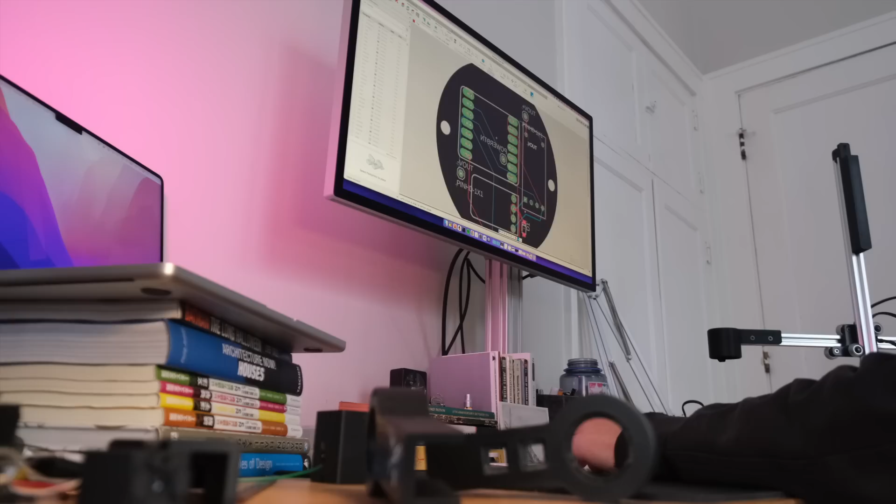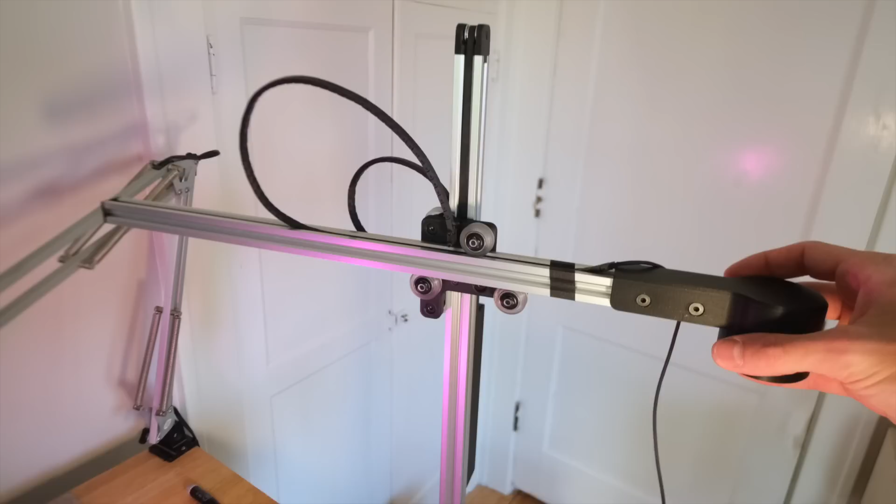I've been making some progress on my open source version of the Dyson light cycle, and I have some pretty exciting updates to share. Last time I managed to implement a drag chain based cable management solution that, while not as tidy as the original Dyson solution, does the job in a way that's affordable, easily reproducible at home using 3D printing, and is relatively discreet.

This time, it's all about terminating that wiring with some electronics and lighting controls.

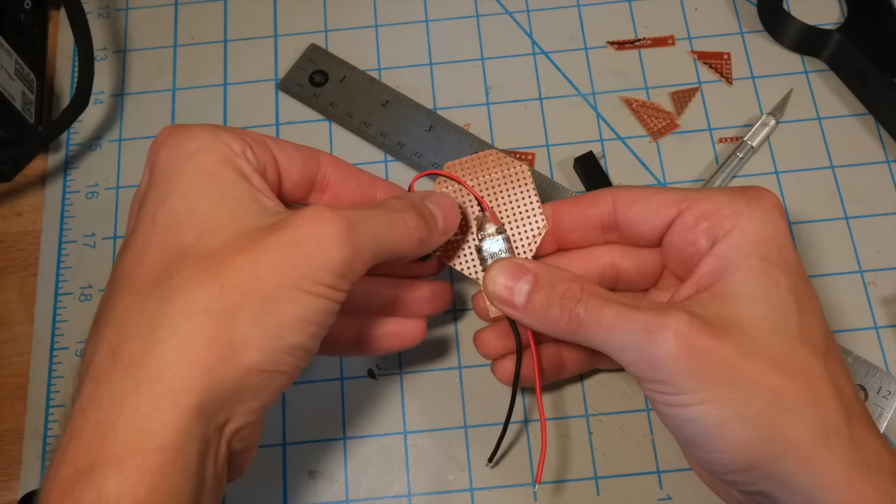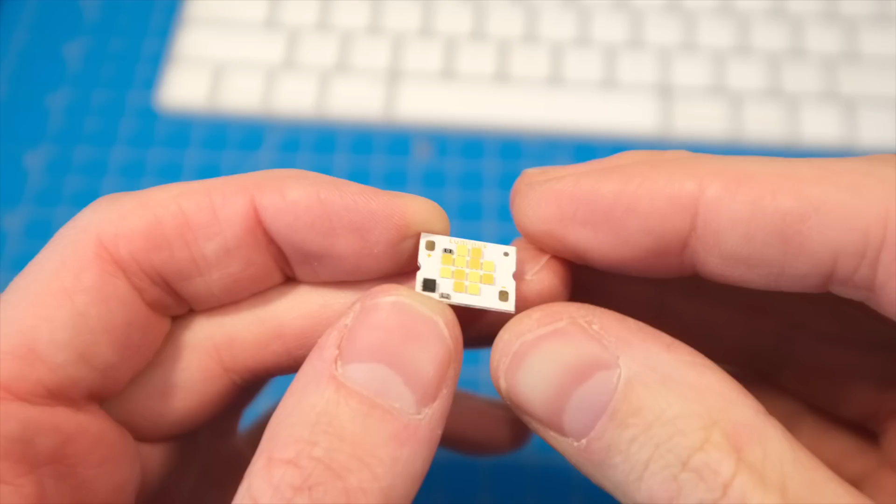One of the questions I've left unanswered until now is how is the user interface of the lamp actually going to work? As a bare minimum, I need a way to cycle the power on and off, and also to control the brightness level. The real Dyson has additional advanced features, like the ability to match ambient brightness and light temperature of the room, but I'm going to keep it simple for now and just stick with power and brightness, though I'm already investigating ways how I can add variable color temperature in future versions.

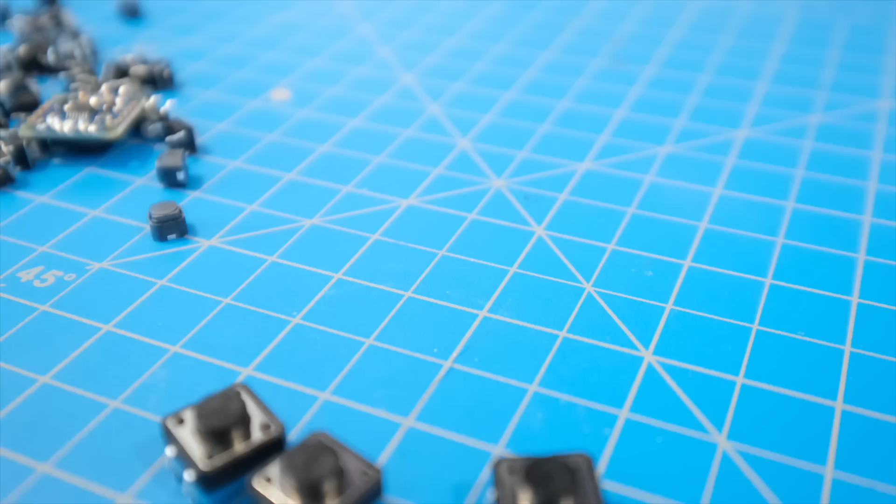Put simply, I need a hardware solution for talking to that code that I covered a few build logs ago that determines the brightness of the lamp. And I think I can do this with 3 buttons: one for toggling power, one for increasing brightness, and one for decreasing brightness.

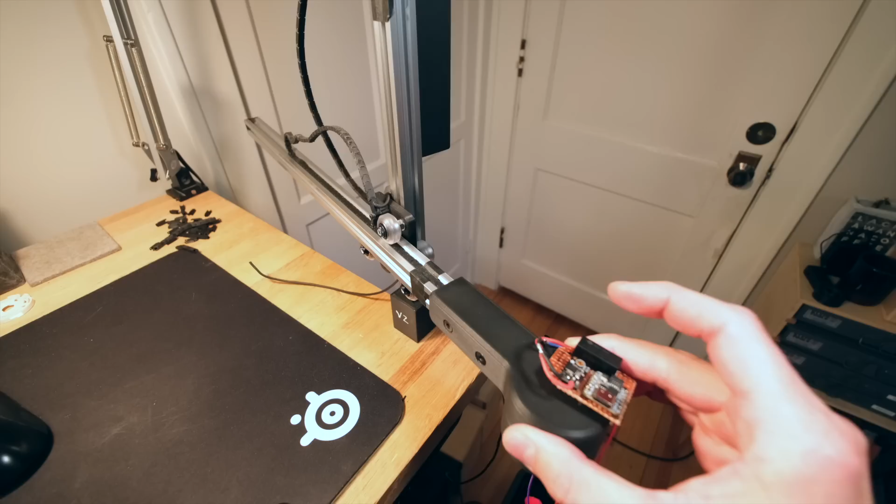Like the original Dyson designers, I think the best place to put these controls is in the same general area as the LED itself, because this is where I'll typically be interacting with the lamp when positioning it. So intuitively, it just makes sense to me to put the controls right here as well. This placement has the added benefit of simplifying wiring since I'm already going to cram all of my electronics inside of this housing anyway. More on that later.

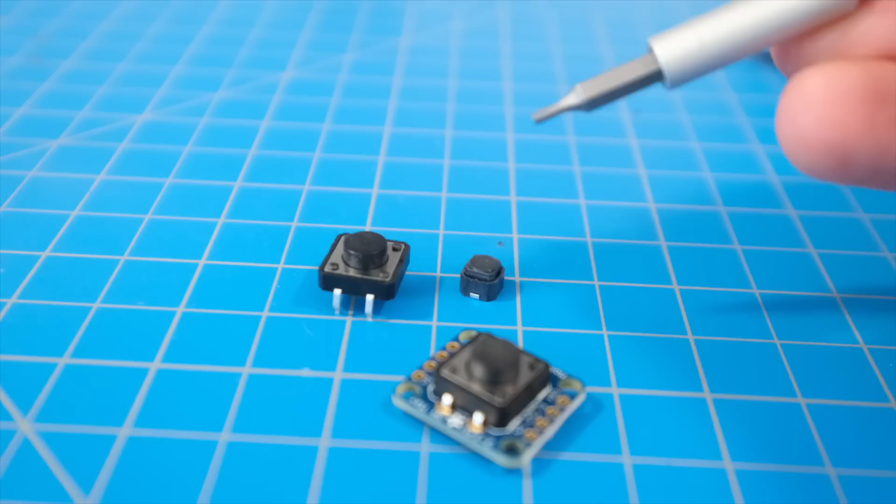Basic momentary buttons like this are an obvious, reliable, and affordable choice. In most cases, the force required to depress the button is negligible. You wouldn't even think about it as a problem or a constraint, but here it poses a problem because the lamp's motion system is meant to move with just the slightest touch. And I spent a long time making sure that this was the case. As a result, the amount of force needed to depress a mechanical button like this is more than enough to reposition the entire lamp. So for reliable one-handed operation, I'll need to find another solution.

A better solution would be a button that has no resistance at all, say a capacitive button like this one, made by Adafruit. It's designed to operate just like a traditional clicky button, but the switch is triggered when tapped by a conductive object, like your fingertip, as opposed to a mechanical switch. These Adafruit ones are beautiful in their own right, but I've always envisioned these buttons sitting flush with the top of the LED cover, and I don't really see a straightforward way of mounting them so that we get that flush look.

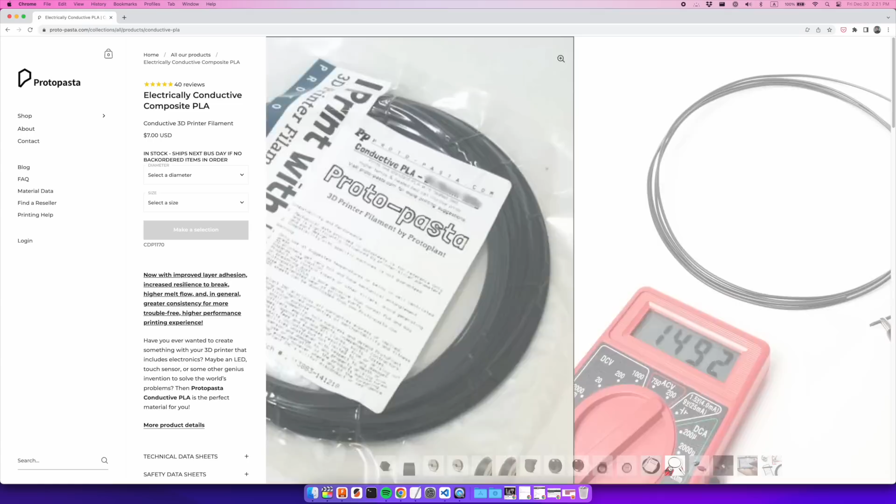I chewed on this problem for a couple days, and then I remembered that at some point I had seen that Protopasta sells this specialty filament that's electrically conductive, and if it works like they say it does, that should mean that I could just 3D print some buttons in whatever shape and whatever form that I want, and use them to detect taps. I ordered this 50-gram sample of their electrically conductive composite PLA, and to my surprise, I had working 3D printed buttons within minutes. Well, it wasn't actually quite that easy.

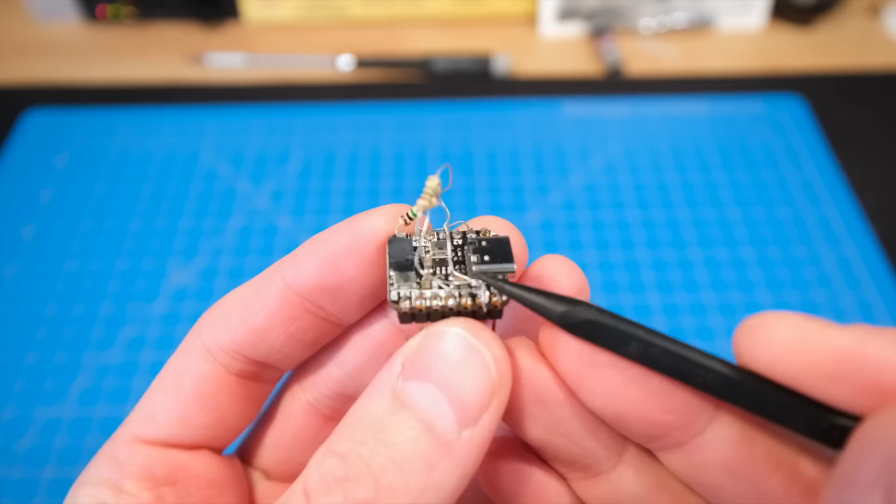The version of the QT Py that I have, the RP2040, doesn't natively support capacitive buttons. So to make it work, I had to add resistors to each of the 3 pins, connecting them to ground. It turns out there's another QT Py model called the QT Py SAMD21, which functionally is, for my purposes, almost identical to the 2040, but it comes with native support for capacitive touch. So I went ahead and just made that upgrade.

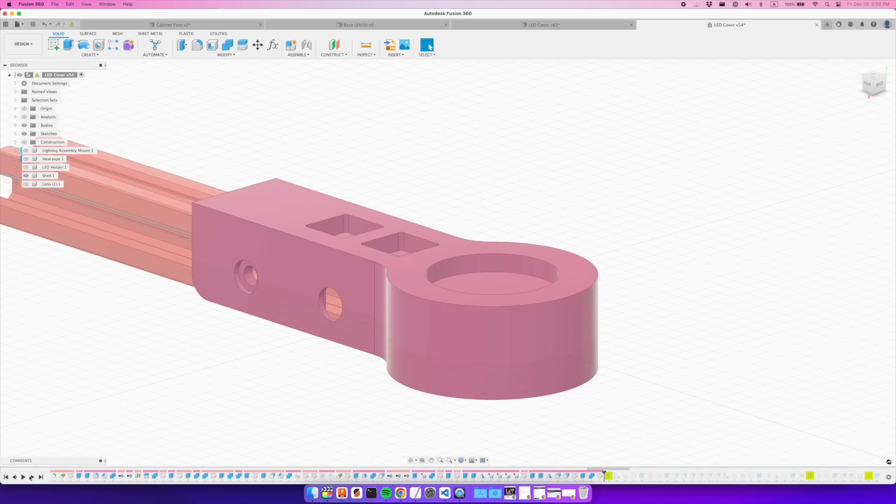With the proof of concept for the capacitive buttons complete, now it's time to integrate them into the LED cover and ideally make them look good too. My original vision for this is that the buttons would just sit flush with the surface of the LED cover, almost like they're directly integrated into that part. My thinking here is that this would achieve a nice streamlined look, and it would mimic the minimalist nature of the original Dyson's controls. But after prototyping it out, I'm really second-guessing this concept. I definitely see a bit of that minimal aesthetic coming through, but there's just something off about it.

I think the thing that's bothering me is that when you're in a newer car where the console is made up of almost all capacitive buttons, I often find myself fumbling around blindly, just pressing buttons accidentally, and having a really frustrating time. In those situations, what I really want is something physical and tactile, just a little feedback so I can locate the button without looking and then press it.

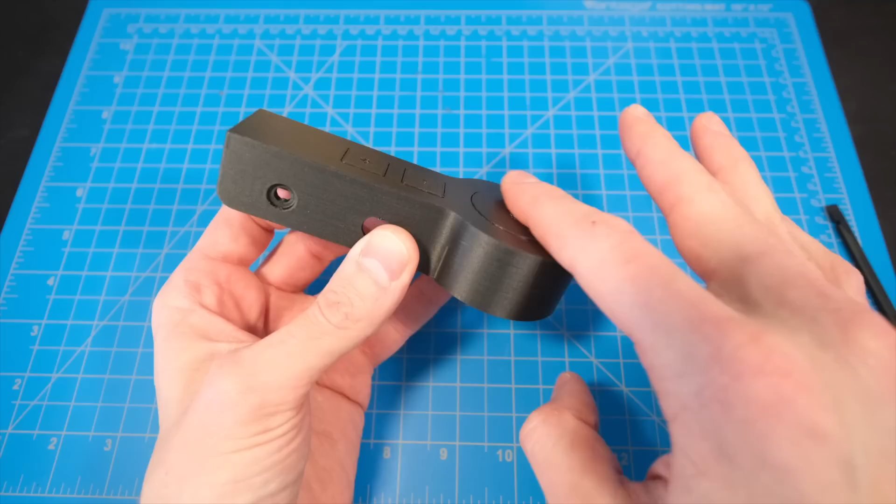That's what's so great about old-fashioned knobs and mechanical buttons in cars - it enables this two-step process of orientation followed by interaction, where you first probe the general area of the button you're looking for, and then decide to interact with it. I think that's what's missing here. As tempting as it is to strip away visual noise and complexity, it's hard to justify that decision when it leads to a worse experience.

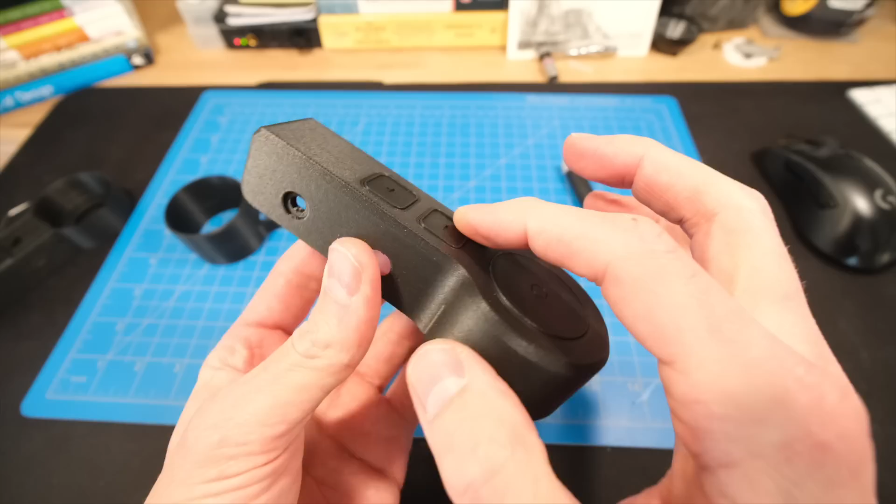So let's make sure these steps happen in the right order - orientation first, then the choice to interact. With that in mind, in my next iteration I added a raised perimeter around the outside of each button to act as an orientation device. You can creep your finger along the surface of the LED cover and know exactly where you are at all times without any accidental button presses.

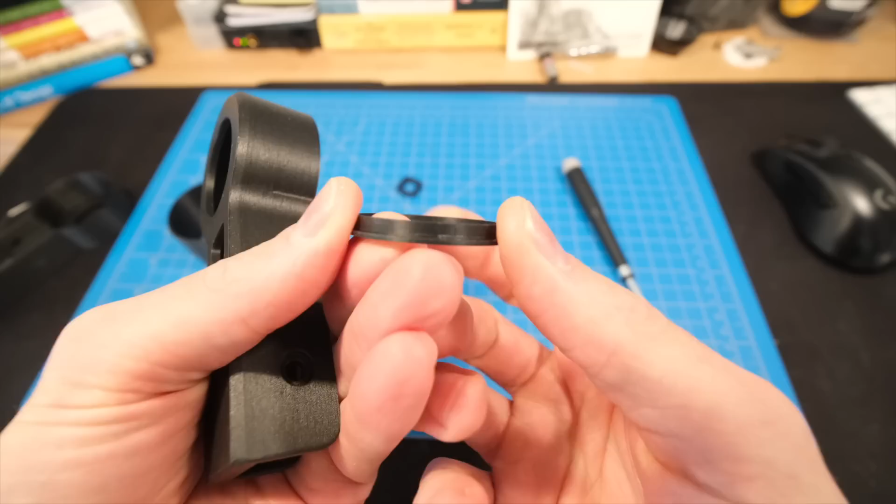Outside of the usability benefits, there's also construction benefits. Since these raised perimeters sit just above the surface of the LED cover, I have to make them into independent little sockets, printed separately and snapped into place afterward. This eliminates the overhang from the previous design and produces a much smoother, more consistent surface, meaning the buttons and sockets will always slide perfectly into place and sit parallel to the cover surface. It's a small thing, but it really helps tidy up this area and make it look nice, neat, and intentional.

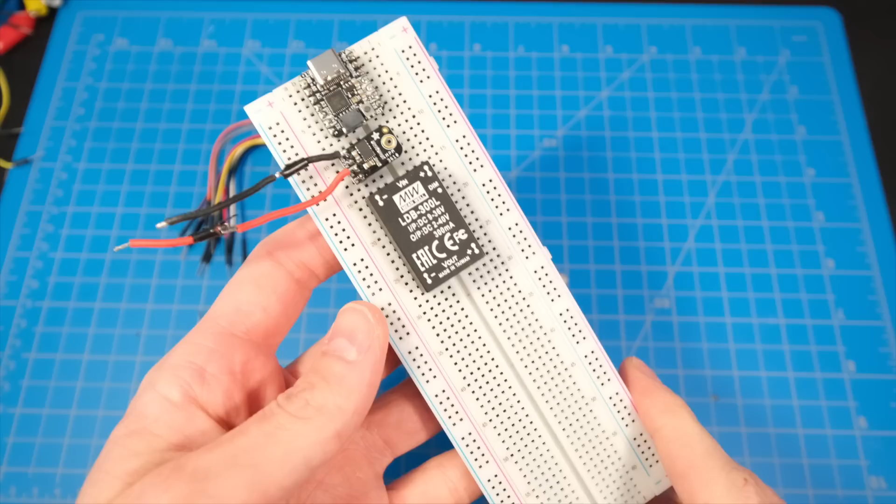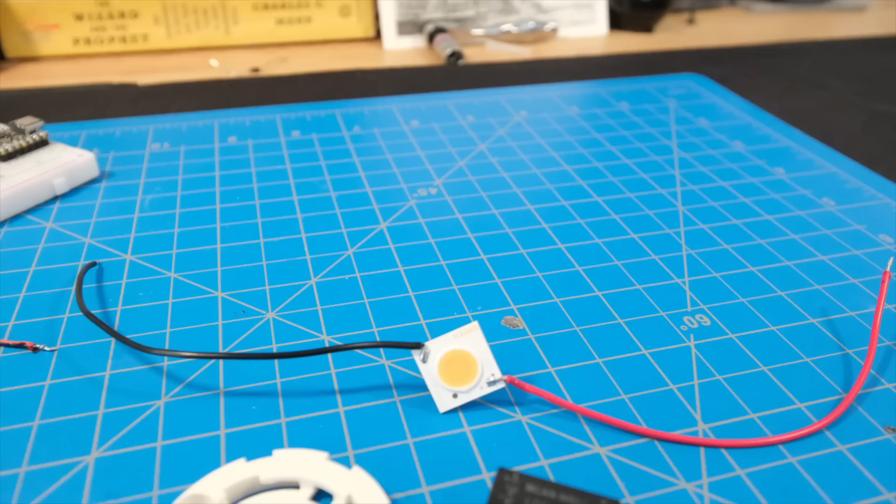These buttons are pointless if they don't control anything, so let's switch gears to electronics. First off, I have some new components. Trying to cram all the LED electronics into this tiny housing, it was immediately obvious that this LED power supply was way too big. Finding a smaller LED driver was easy, but it broke compatibility with my LED, so I had to take a step back and do that cabbage, rabbit, fox riddle a bit more until I found an LED compatible with the driver and a holder compatible with the LED.

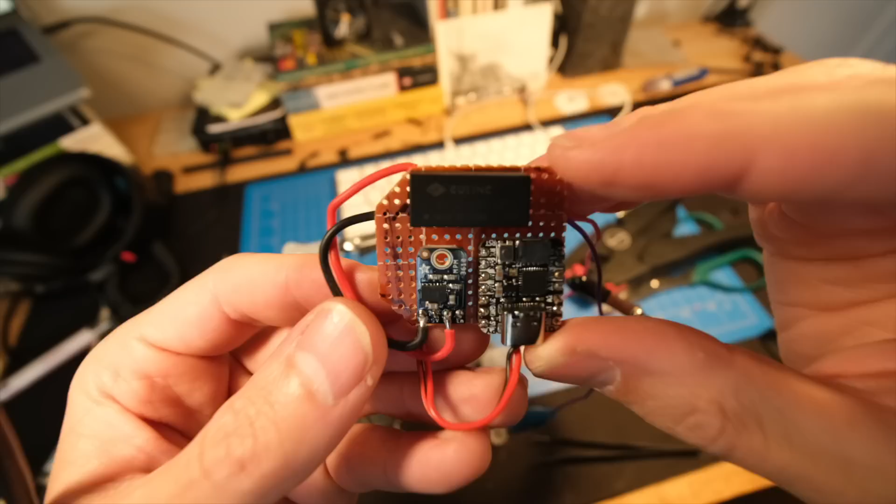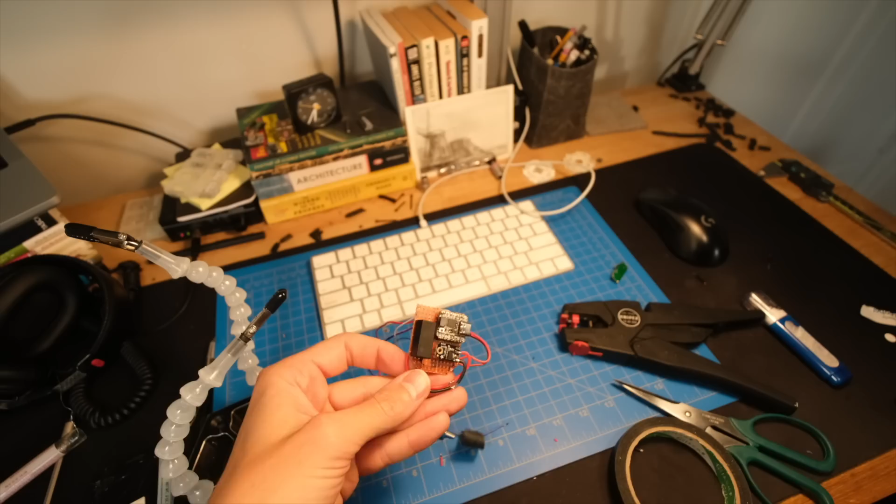With those in place, I can finally move on to the fun part, which is that I made a PCB - my first PCB. I didn't really think it would come to this, but I wasn't satisfied with my attempts to cram all these components into the LED cover. If you've done a project like this, you know simple things like wires can take up a lot of space once you try to wire components together, and space is so limited here that every square millimeter counts. Fitting everything onto a custom PCB saves a ton of volume, letting me cram everything in tidily.

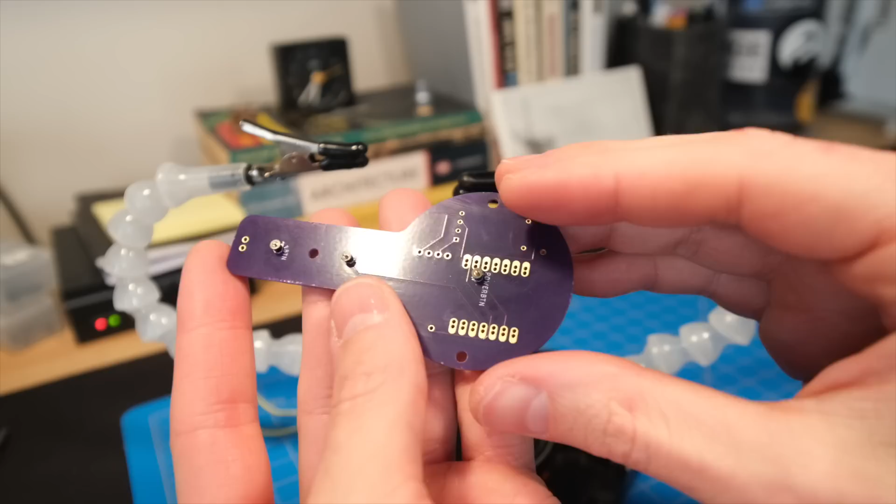This is my PCB. On top there's the QT Py for controlling the brightness, the LED driver sits next to it, and there's a buck converter which powers the QT Py. I also added a little diode which ensures the 5 volts coming from the buck converter into the QT Py only goes in one direction. On the back, I have 3 pogo pins aligned perfectly with the capacitive buttons on top of the cover, ensuring constant contact without having to permanently attach those buttons to the PCB.

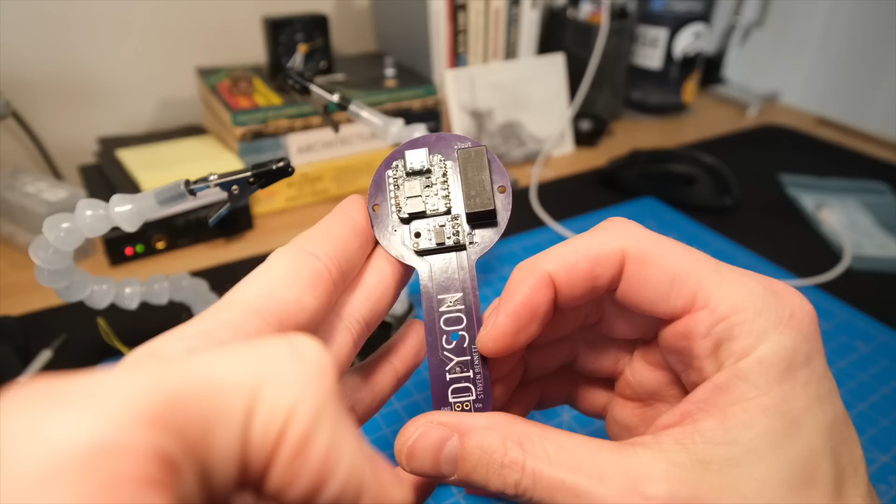I'm really satisfied with how this PCB turned out. I was initially really intimidated by the prospect of designing a PCB, so pulling this off feels like a personal milestone, and weirdly it was both harder and easier than I imagined. I want to call out this guide I found on Adafruit, which is a perfect introduction to both the theory and execution of designing a PCB. I'll leave a link in the description for anyone who wants to break into this, and I'd really recommend it if you have a project that could benefit. I seriously can't recommend it enough.

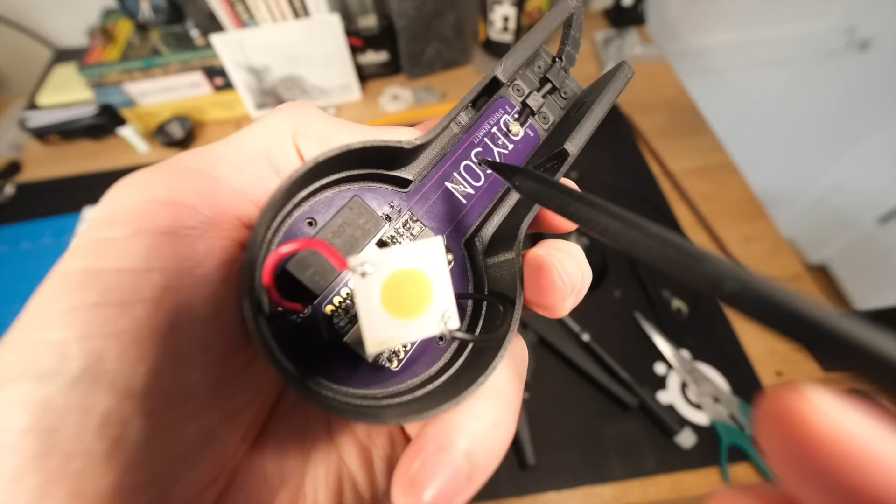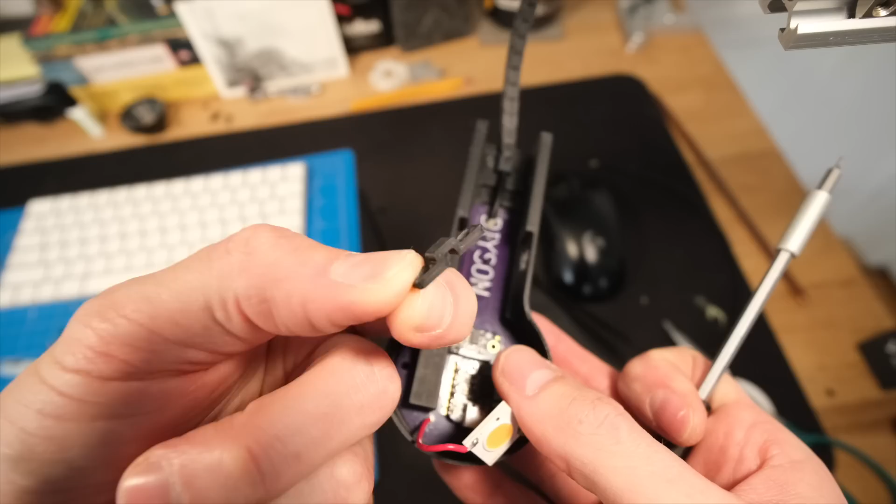Alright, back to the lamp, and it's time to mount the loaded up PCB into the LED cover. These 3 holes are used to mount the board in this little recess, held in place by 3 M1 panhead screws screwed directly into the plastic of the LED cover. The final touches are a little strain relief clip for the power cable, and one more drag chain termination piece to tie everything together.

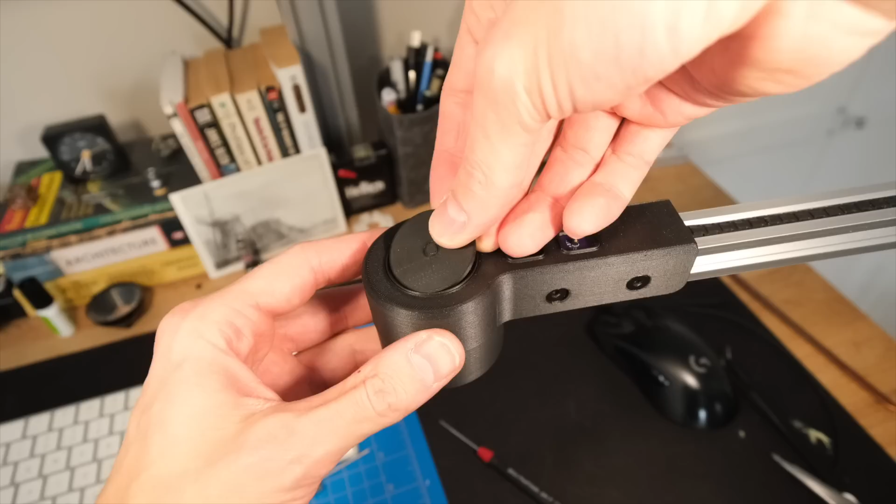And now, finally, it's time to power on the lamp for the first time - a momentous eventuality that has pervaded the consciousness of at least several people for over...

It flickers. Fortunately, this only appears on camera, and double fortunately, it does seem like the PCB is working correctly. But yeah, this flickering is really bad, and I can't use this lamp on camera if it continues to do this.

To be totally transparent, I have known about this problem for a while. The flicker only appears on camera, so I didn't notice until I started shooting the electronics portion of this very video.

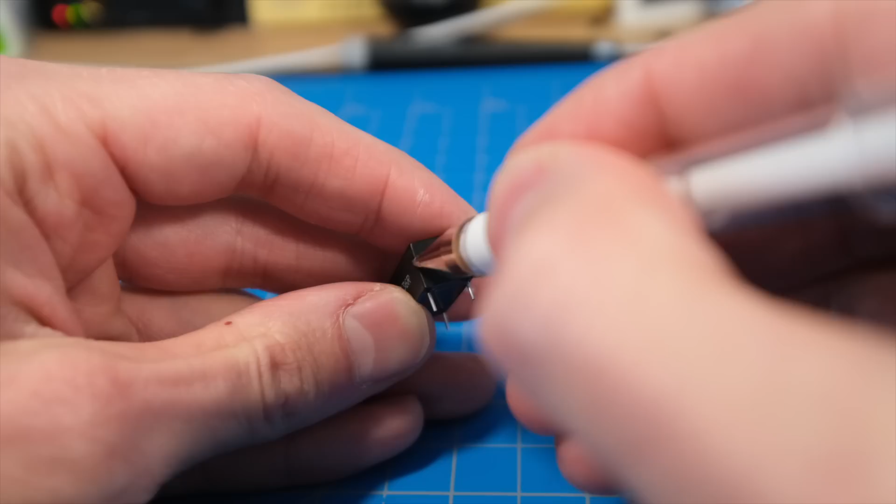My first instinct was just to eliminate the flicker by increasing the PWM frequency. This LED driver is already maxing out at 1 kHz, which is its maximum frequency, so I had to do some careful overclocking. After that was done, I quickly went into the code and cranked the frequency up to 4000 Hz, where mercifully the flickering stopped.

And that's where the whining started. It turns out that pushing the PWM frequency beyond the stated maximum, even if you overclock it, introduces a high-pitched whine that, by the time you get to 4 kHz, is audible from a few feet away.

So that's the dilemma I'm faced with right now. Do I keep the frequency low and deal with the on-camera flickering, or eliminate the flickering by introducing the whine? To be honest, I don't think either way is really acceptable for the final version, and I'm a little stumped with what to do here.

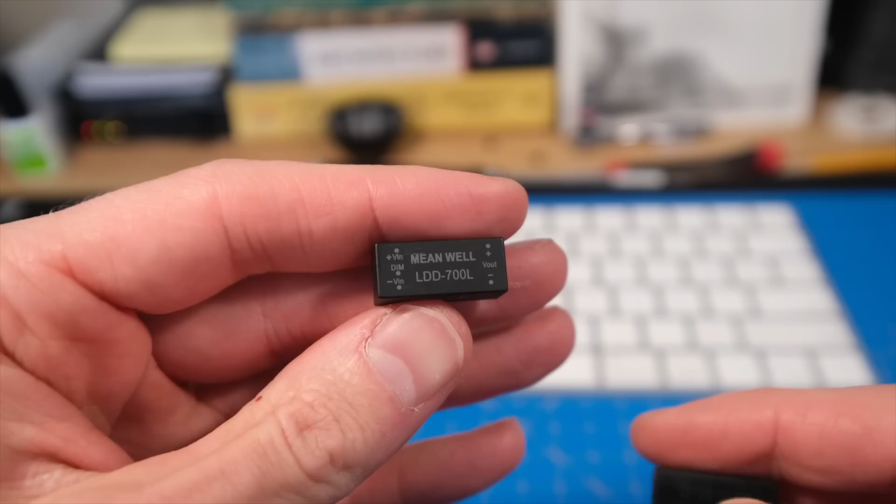My only concrete path forward right now involves swapping this for a driver that has analog dimming, but that comes with its own challenges, because electronics is a real weak point for me.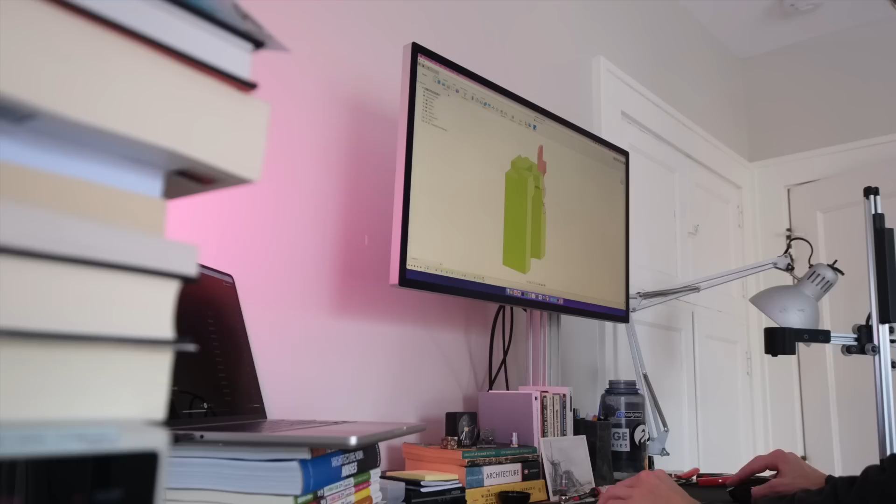For now though, for your sake, I'm going to choose the less visually objectionable option and leave the frequency overclocked, and I'll spare you from the whine. Alright, I'll keep dealing with this, I'll find a solution, but let's move on to some other updates.

Down at the base of the lamp, I integrated a drag chain termination clip into the base adapter. This clip is really similar to the one that we saw on the LED cover, and it just functions to hold the drag chain in place and give the cable a safe exit route.

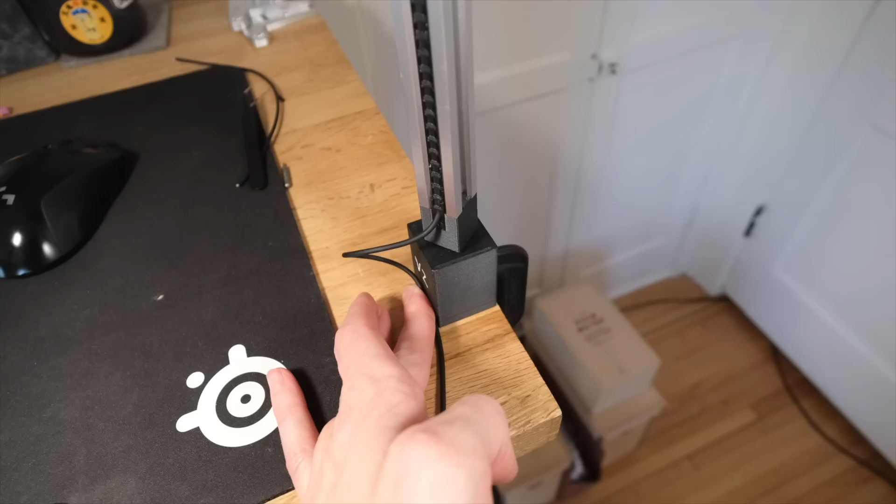While we're down here, I've also started working on how to make the transition from this dynamic part of the lamp down to the static base. I could just leave enough exposed slack that would allow the lamp to turn a full 360 degrees, but if you watched any of my last build logs, you know that I rarely settle for the first solution. So I want to find a more elegant solution to completely hide this transition into the base.

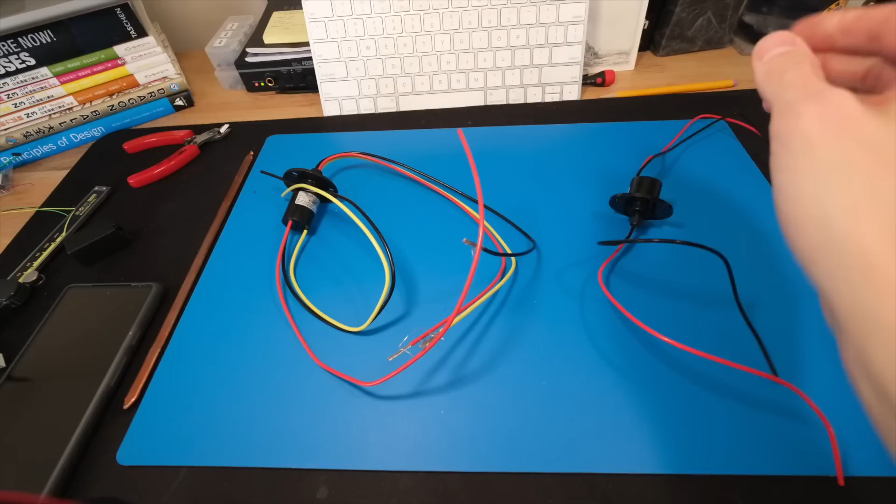I think one way that we could do that is using what's called a slip ring. I've never used one of these before, so I picked up a couple of cheap ones just to play around with and see how they work. I've already started working on a couple of prototypes using this really tiny slip ring, but I want to work some kinks out before I share it in more detail.

But I think it's going to be really cool once it's done. Some small improvements to the code include a smooth transition between any change in brightness.

So when you power the lamp on, it will fade from off to the last brightness value, and when you change brightness, it is a smooth transition from the current brightness to the desired brightness.

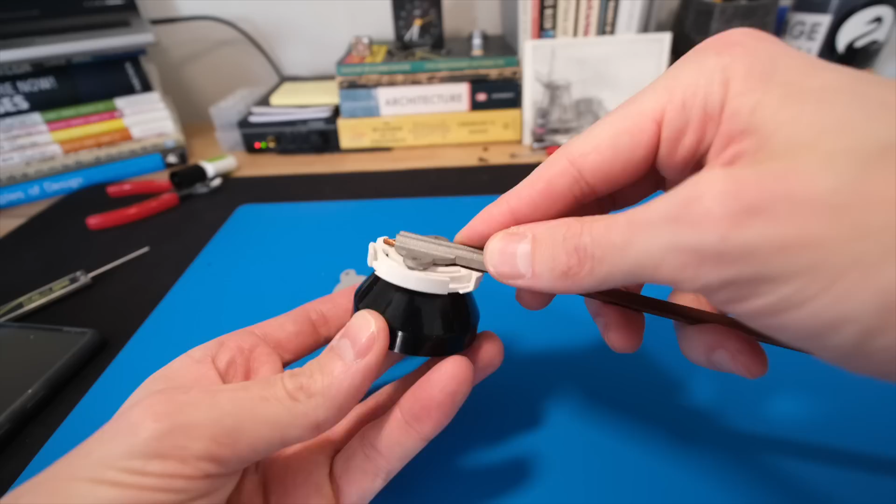Lastly, I finally got a usable part back from Shapeways, who I was using to fabricate this little metal adapter that holds the LED against the heat pipe and then gets fastened to the end of the arm. While this part works, it has taken me months and many iterations to get it right.

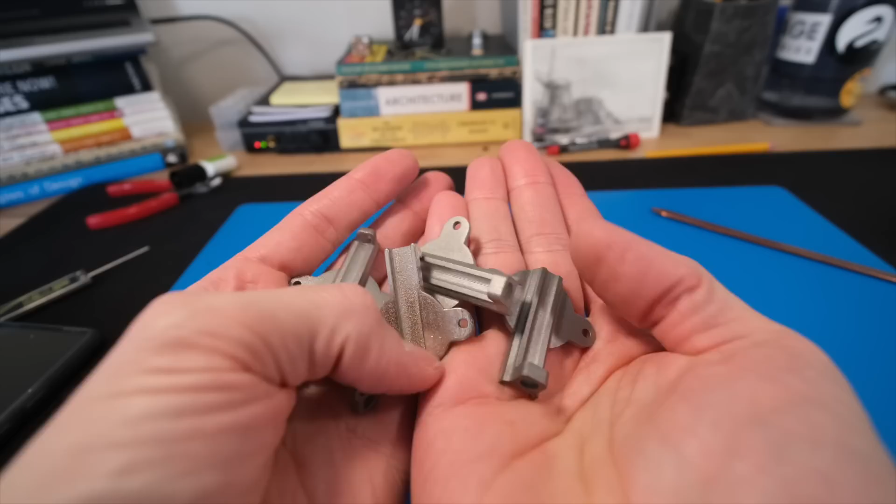Warping and shrinking issues that arose from the manufacturing process have made this little component a bit of a nightmare, and I wouldn't feel good about asking anyone else to roll the dice with their own money to order this part for themselves. Instead, what I plan to do is redesign this part with CNC machining in mind, and then hopefully find a way to manufacture it cheaply and get it out to people who want it.

I need this part to be strong, heat resistant, and ideally thermally conductive, so if I can get this part affordably CNC'd out of aluminum, I think that'd be a much more preferable option. I'll come back to this part in a future build log and let you know what I'm up to.

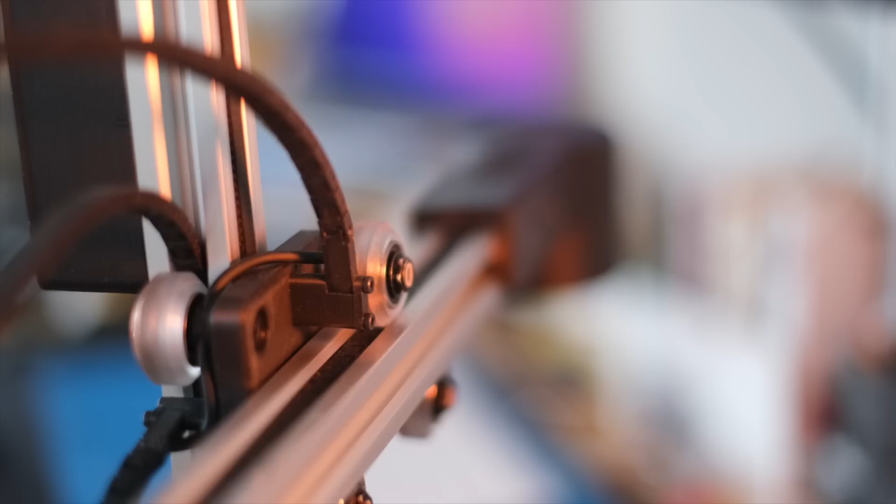Alright, I think that pretty much wraps up my progress so far. I have some really interesting, exciting, challenging improvements in mind for the next build log, so I really hope you'll come back for that one.